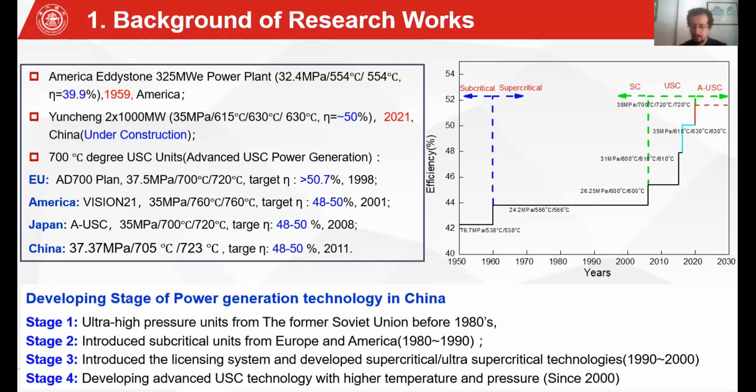Until 2018, there were 105 USC power generation units in China, and the standard coal consumption decreased continuously from 283.3 grams per kilowatt hour to 256.2 grams per kilowatt hour for USC power generation units in the last decade.

The largest capacity 1,350 megawatt USC double reheat unit with different location arrangement of steam turbine in the Anhui Pingshan project will be operated in 2020, and the design coal consumption is around 251 grams per kilowatt hour.

In the future, it's planned to build a 35 megapascal, 650 degrees C advanced ultra-supercritical power generation unit with double reheat. Due to the problems of superalloy materials, the construction of 700 degrees C advanced ultra-supercritical units will be postponed to 2030.

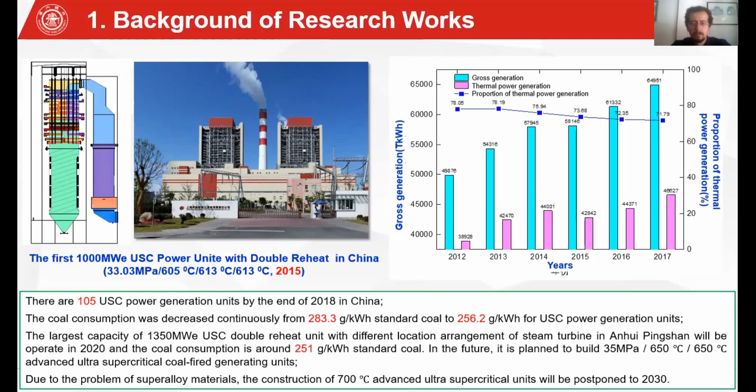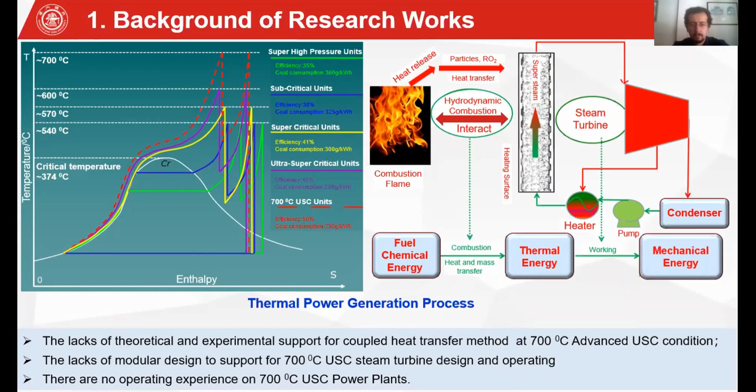There is still room for further efficiency improvement in the power generation system to upgrade the temperature to the 700 degrees C level, but there is a lack of theoretical and experimental support for 700 degrees C boiler and turbine design and operating experience, especially for the long period test of characteristics of nickel-based materials.

There is still room for further efficiency improvement in the power generation system by optimization of the thermal system. The efficiency gap between the actual steam water cycle and the ideal Carnot cycle is mainly composed of process loss and internal losses, such as pressure drop loss, blade sealing, etc.

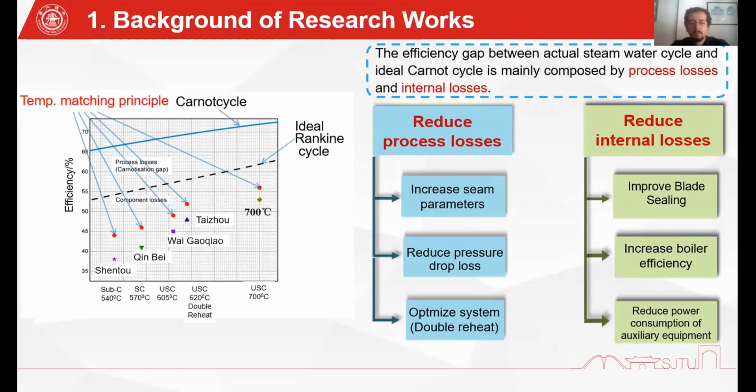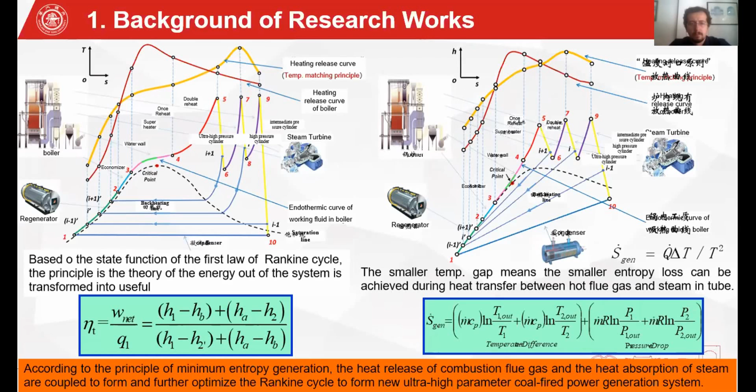According to the principle of minimum entropy generation, the heat release from combustion flue gas and the heat absorption system of steam are coupled to form and further optimize the Rankine cycle, forming a new ultra-high parameter coal-fired power generation system.

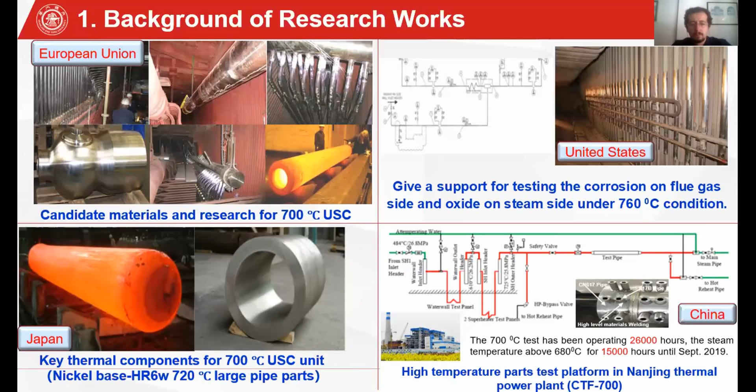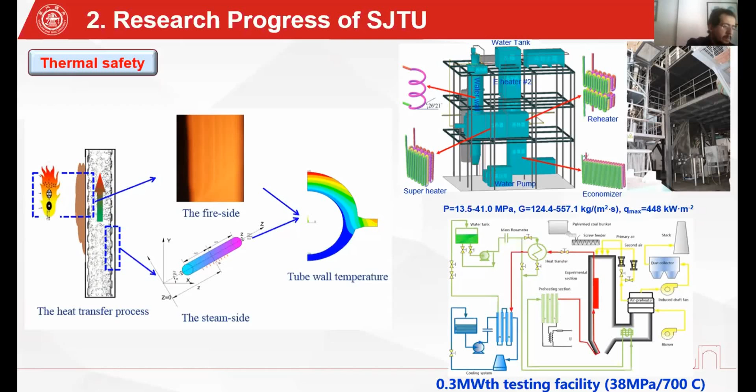In order to obtain the exact metal temperature and the precise heat transfer coefficient under 700 degrees C USC conditions, a 0.3 megawatt test facility was designed and constructed to simulate the heat transfer characteristics of the high-temperature heating surface in an advanced USC boiler at Shanghai Jiao Tong University. The main parameters of superheated steam are 38 megapascal and 700 degrees C.

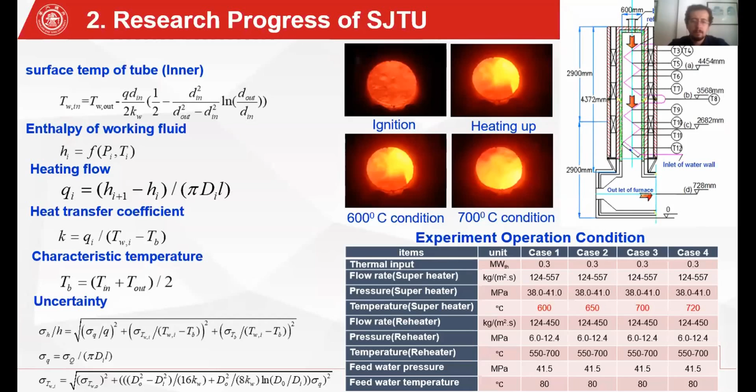The heat transfer coefficient K was used to couple the heat transfer between the combustion side and the working fluid side, based on the interface temperature of the heating surface.

The coupling relationship between the hydrodynamics of the working fluid side and the combustion flue gas side was established, and the temperature distribution characteristics under 700 degrees C USC conditions were obtained. The figures show the program calculation flow chart of the coupling model.

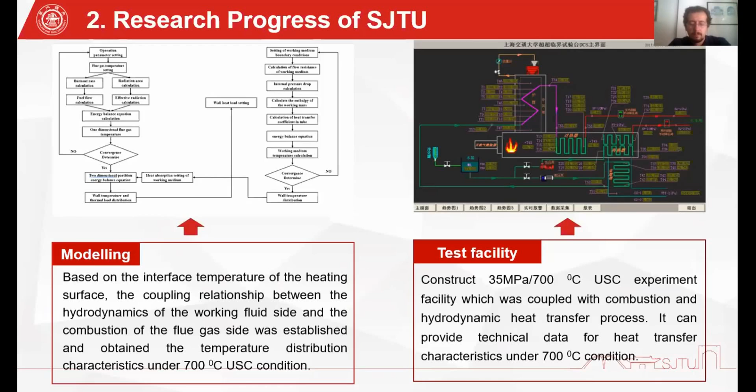The specific description is shown in the table below. In the combustion side, the flue gas in each zone is consistent and the flow field is uniform. The water wall surface around the furnace has the same boundary conditions. Combustion mainly occurs in the combustion zone. The combustion products are concentrated near the actual tangent circle and then flow up with the gas flow directions, regardless of the reflux.

In the working fluid side, the water wall tube receives radiation and convectional heat transfer in the furnace, neglecting the axial heat conduction. Working condition of flue gas side in furnace doesn't change obviously with time. Each tube has the same mass flow rate and the same fluid characteristics on the cross sections. The flow resistance of each section is mainly concentrated in the inlet section and the pressure keeps uniform.

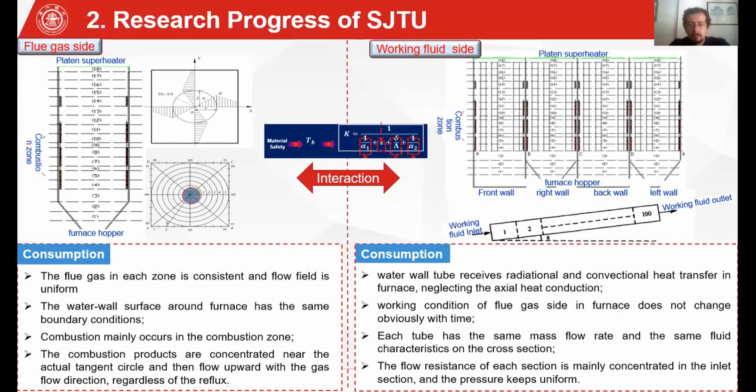Based on the experimental data, the heat transfer coefficient of the furnace at different loads was calculated, and the actual heat transfer coefficient of the furnace was extrapolated at 507 megawatt load. The coefficient is 325 to 575 watt per meter square degree C.

At 662 megawatts, the coefficient is 325 to 525 watt per square meter per degree C. At 970 megawatt load, the coefficient is 350 to 400 watt per meter square per degree C.

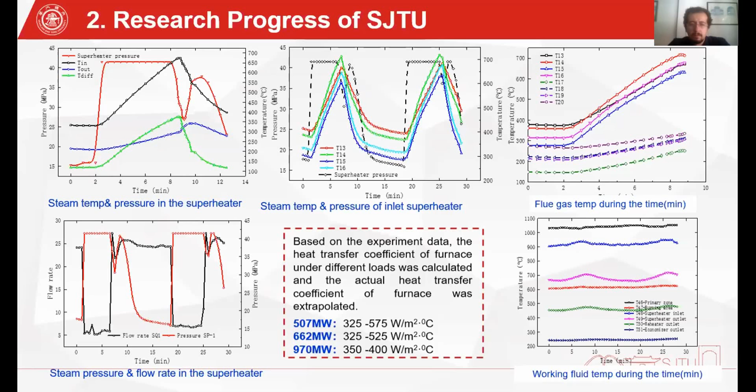The figure shows the temperature distribution of water wall temperature along furnace height in the combustion zone for both 700 degrees C and 600 degrees C USC conditions at different loads. And the right figure shows the temperature distribution of front wall and right wall of water wall along the direction of the furnace at different elevations.

As you can see, the peak value of water wall temperature appears in the main combustion zone. The highest water wall temperature in the furnace is around 619 degrees C, which is 75 degrees C higher than that of the 600 degrees C ultra supercritical condition.

The distribution of water wall temperature along the furnace perimeter direction is similar in both 600 degrees C and 700 degrees C ultra supercritical conditions. The temperature fluctuation in the 600 degrees C condition is 70 degrees C and 34 degrees C respectively at 34 meter and 40 and 54 meters. And the temperature fluctuation is 85 degrees C and 57 degrees C respectively in the 700 degrees C condition.

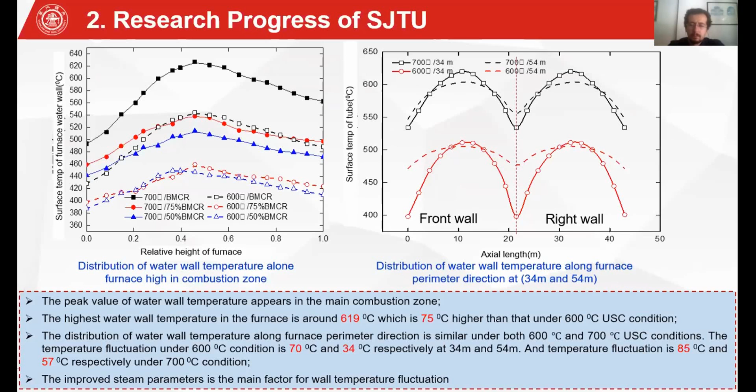These pictures show the effect of the distance of flame offset and the working fluid rate deviation in tube on tube surface temperature. It can be seen from the figure that with the increase of distance of flame offset, the fluctuation deviation of tube wall temperature increased by 35 degrees C. The effect of flow rate deviation on the maximum wall temperature is significantly higher than that of flame offset.

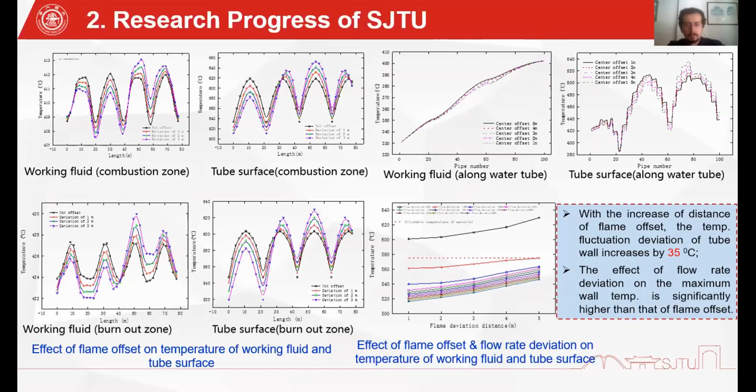The above figures show the relationship between the surface metal temperature of heating surface and the allowable temperature for metal materials under different extreme conditions. As can be seen, there are some conditions where the tube temperature exceeds the allowable material temperature of 550 degrees C due to the existence of conditions on water flow rate deviation and flame offset. The higher elevation means the higher sensitivity of tube temperature to water flow rate deviation and flame offset.

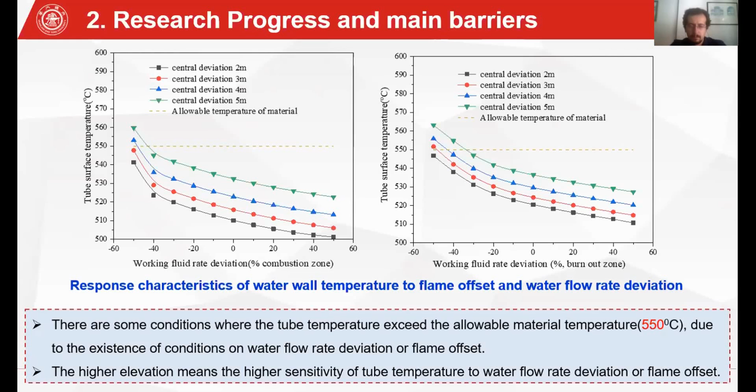Main conclusion: we constructed a 700 degrees C ultra supercritical condition heat transfer test facility with coupling both combustion and hydrodynamic process, at steam parameters of 15 to 40 megapascal, 350 to 717 degrees C. We developed a combustion hydrodynamic coupling heat transfer model, and the wall temperature variation law at 700 degrees C ultra supercritical conditions has been obtained.

Based on the experiment data and calculation results from the developed coupling heat transfer model, the highest water wall temperature in the furnace is around 619 degrees C, which is 75 degrees C higher than that of the 600 degrees C ultra supercritical conditions. There are some conditions where the tube temperature exceeds the allowable material temperature of 550 degrees C due to the existence of conditions on water flow rate deviation and flame offset.

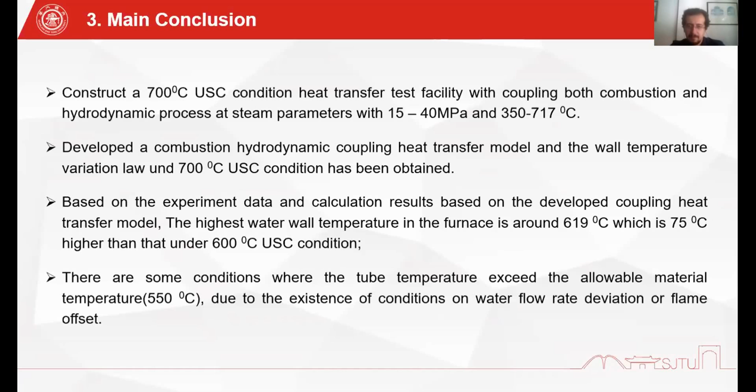Perspectives: In order to solve the key issues on thermal safety of high temperature components in boiler, the following research works need to be done in the future. The experimental apparatus at 700 degrees C conditions, combined with combustion and hydrodynamics, is needed for the basic testing data to conduct the heat transfer characteristics at the 700 degrees C level.

The coupled heat transfer simulation procedures of combustion and hydrodynamics with temporal and spatial variables is essential to advanced ultra-supercritical boiler design and operating. The long-term test verification is imperative for the higher temperature surface with various candidate materials.

The 650 degrees C ultra-supercritical technology based on austenitic steel may be a transition between the existing 600 degrees C ultra-supercritical technology and the advanced 700 degrees C ultra-supercritical technology.